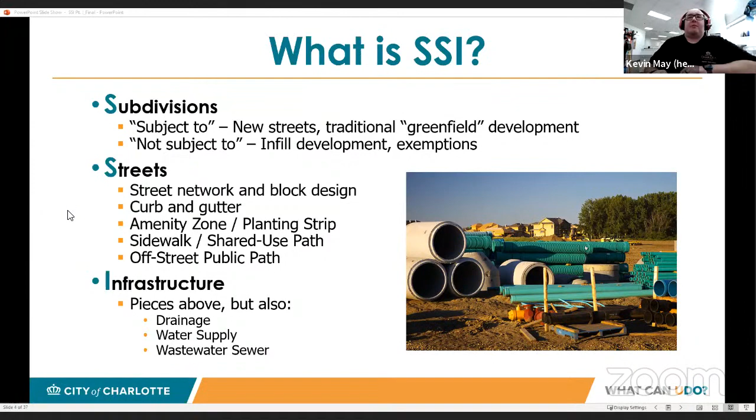So as we go forward, some of the high-level concepts and goals that we're trying to achieve as we go through our development of an SSI article is, as always, ensure alignment with policy. We want to recognize and address trends.

The subdivision ordinance, I think, was absent the 160D text amendment here recently, passed or updated in 2015. If I'm not correct on that, Josh or somebody can correct me. But that seems like it wasn't that long ago, but it was 6 years. And we all know that development can change pretty rapidly. Even though 6 years was probably pretty recent, the development world can change pretty frequently and fast as well. So we want to recognize where we currently are at, and then maybe also try to extrapolate out for some trends that may be coming as well.

And then also just a larger theme of the Unified Development Ordinance: we always want to create a better and more user-friendly structure. And then again, as part of that larger umbrella effort, providing consistency and uniformity—really putting the unified in the Unified Development Ordinance. We've heard this feedback, especially recently through our last series of meetings, and that's really trying to, as part of this effort, identify and leverage trigger alignment possibilities when it's feasible. It may not always be feasible to have alignment in those triggers, but where we can, we're going to aim to achieve that.

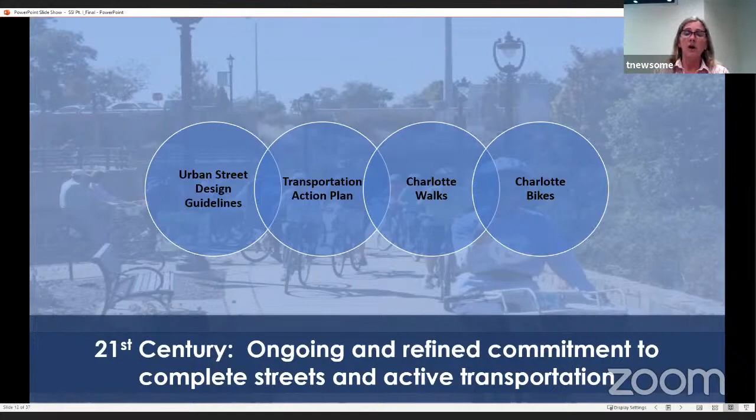So this has been a steady path in a direction towards a more multimodal network, a more sustainable network. And this is really culminating now—could you advance, please—culminating in the policies of the 2040 plan.

Kevin pointed out some of those policies, and as we go through the next few weeks and look at specific elements of SSI, you'll see that from a policy standpoint, it's more a commitment, a continuation of the same policies that have been in place for some time—basically to overcome having built a certain way for 50 years, and now making sure we're building in a way that is more sustainable, more multimodal. Can you advance, please?

As Kevin said, we're going to be pretty basic today because we want to make sure everybody's using the same terms or is familiar with the terms.

So we get asked the question, what is a street, since this is a street subdivision and infrastructure chapter. There are really two ways to look at this question: the basic question of what is a street, and then the more specific question of what is a street in terms of the UDO and how it's handled in the UDO.

For the basic question of what is a street—if you think about how a street feels and functions and how people use it—it really is that building-front-to-building-front space, the entire space between the buildings. From a UDO perspective, though, those of you who have been in this group and gone through the zoning work so far know that things handled on-site, for the buildings and their frontages, are handled in the zoning portion of the UDO. Advance, please.

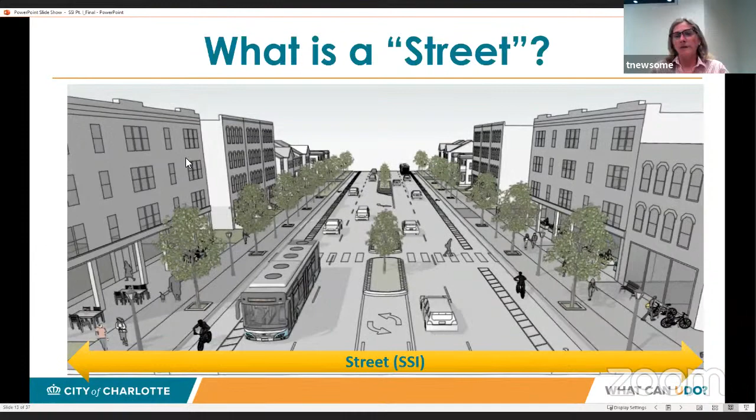And then it includes the pedestrian space as well, the sidewalk, or in some cases a shared use path where pedestrians and bicyclists share that space. So really, those are the components of the street that we're talking about when we discuss SSI and the types of policies embedded in the regulations.

Another basic topic, if you've been in this group all along, you're familiar that we've used these terms in bold in other parts of the UDO: limited access, arterials, collectors, and locals. This says street classifications, and I think you could argue that limited access, which basically includes freeways and interstates, aren't really streets, they're more roads or roadways.

But for the sake of discussion here, we'll leave them in this list as a street classification. So basically we've got limited access roadways, we have arterials—sometimes people use the term thoroughfare, we're using the term arterial—and we have different types of arterials, which we'll look at a little closer. Then we have collector and local streets as well. When we talk about the characteristics of a street, there are a lot of different ways you can say what this street is like compared to a different kind of street.

One of the first types of characteristics we can look at to differentiate between these streets—and I should say all of these streets are really on a continuum. It's a spectrum in terms of each of these characteristics and where they might fall along it. It's maybe not exactly linear.

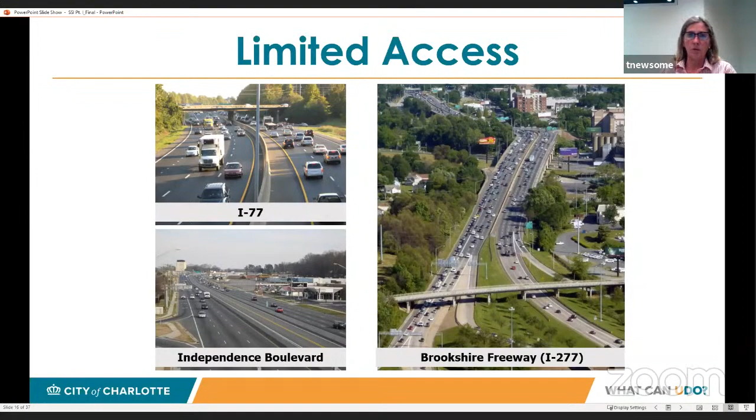In terms of the arterials, the Parkway is really very similar to other types of limited access roadways. We're calling it an arterial street. There are certain design elements we would want to include, even though it is a limited access street, if at all possible.

But it shares a lot of characteristics of limited access streets. You're not going to have a lot of driveways along it. You may have side streets on some of them, but not many. You're going to have a wide, hopefully continuous median.

to limit access and to limit turns. You're going to have a lot of space—you might have 4, 6, maybe even 8 lanes—but you're also going to have a lot of green space to the edges of the roadway, including a clear zone for safety because of the higher speed, higher volume nature of the street.

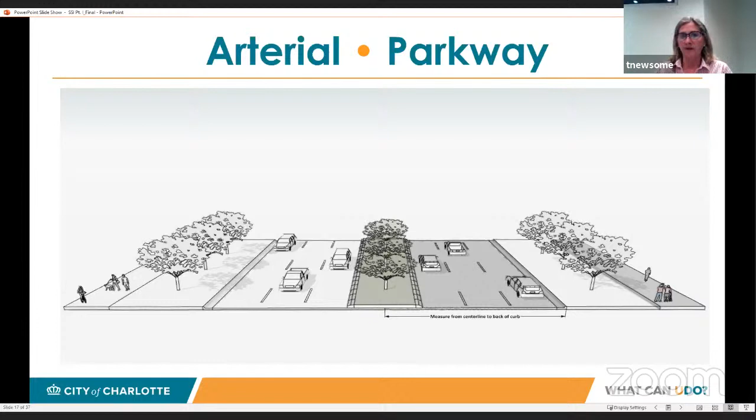If there is a multimodal facility associated with a parkway, it's going to be a shared use path, and it's going to be at the very back of the right of way or maybe outside of the right of way. But this really shares a lot of characteristics with limited access roadways.

A boulevard at this point becomes really more of a surface street, a traditional thoroughfare type street. It is a little higher on the spectrum in terms of speeds than an avenue, and certainly than a main street, but it's still not intended to be a high speed street. It could be anywhere from 4 to 6 lanes.

It is more access managed than some of the other arterial street types. So in terms of the center space, you're more likely to see a continuous median, some limits on turning ability, and some limits on direct access onto land uses along it.

So a boulevard can be applied in a fairly urban context, or it can be applied in a more suburban context, but it typically is going to have more access limitations. Some examples of this would be Tyvola Road in the Marion Diehl portion, or carrying the same corridor through Fairview out by Carmel.

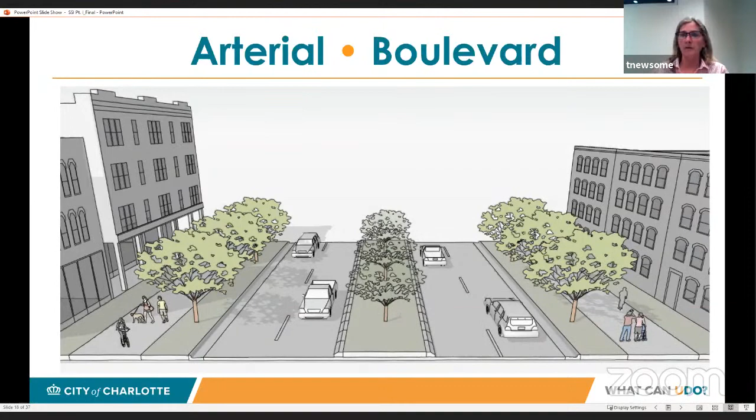Is it a perfect boulevard? Does it have all the pieces? Maybe not, but this just gives you an idea of the type of street we're talking about.

The avenue is probably the arterial street type where we're trying to balance this multimodal aspect as much as possible. Access might still, in some circumstances, be a little bit limited, but it opens up certainly compared to a boulevard. So it's a little less access managed, and as a result, the center space might be very different.

It might be turn lanes, space for turn lanes. It might be portions of a continuous median. It might be space used to create pedestrian refuge opportunities where there might be long distances between signalized crossings, so that people can get across the street. It can work in a very urban environment, and it can also work in a suburban environment.

You're going to have travel lanes. They're going to be anywhere from 2 to 6, but many of them are going to be in the 2 to 4 lane range in terms of through travel lanes. An important point is the speeds will be low. The volumes are expected to be lower than a boulevard, but in some cases they're not, because we still have a sparse thoroughfare network and a sparse arterial network. So that means we can still have some high volumes on a lot of these avenues. The point is we're trying to handle that volume a little bit differently.

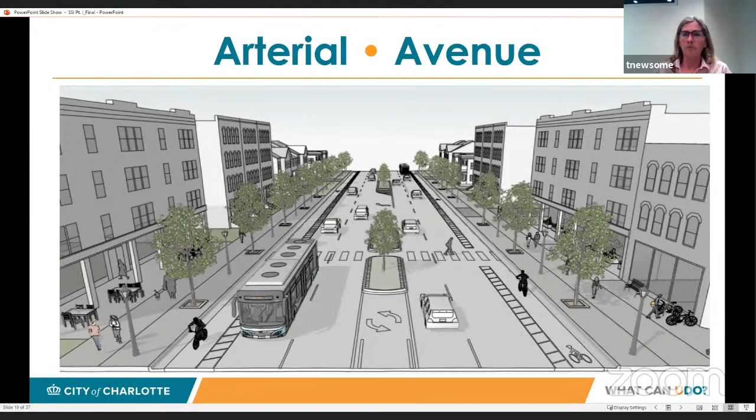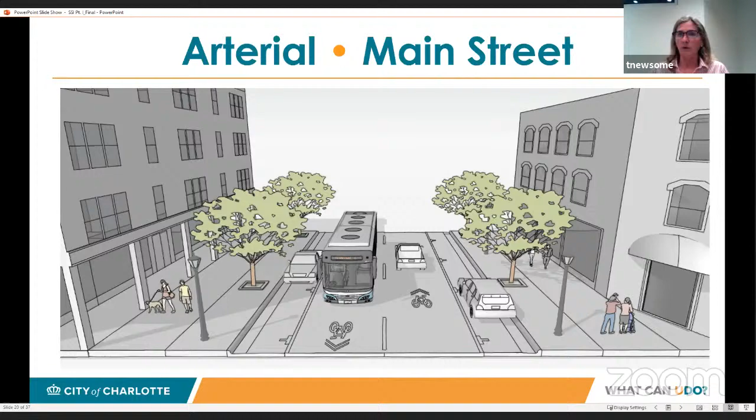So you might be asking at this point, okay, that's great, we've got these different kinds of arterials—how do we know which one is which?

There will be a map that will say which of the arterials is which. This is something we're currently using for the transit-oriented development districts along the Blue Line. There's a map that says not only what is the classification of the street, but what is the expected cross-section for the street and where does the future curb line go, so that we can create clarity and predictability about the changes as they occur along the street. What will happen is that we'll expand this streets map citywide to include basically the entire city, not just the Blue Line, and it will function in much the same way—not very different from how it's being used for TOD now.

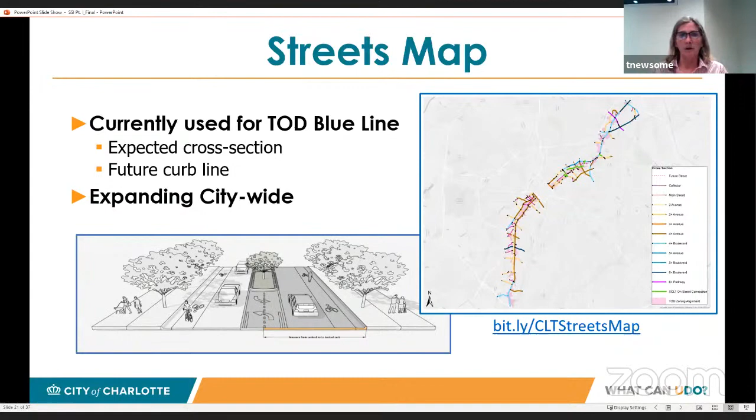So the arterial streets will be on the streets map. Actually, the limited access streets will also show on the streets map, but without cross sections, and we'll get into all of that down the road.

No pun intended. So the local streets are not on the streets map. There are several types of local streets that are basically scaled to the context in which they're used and applied in different contexts. While the arterial cross sections will be on the streets map, the cross sections for these local streets will be in the Land Development Standards Manual, and that's pretty much how it works now as well. So there are residential streets, office commercial streets, and industrial streets, and they are applied in those appropriate contexts.

Collector streets, if you remember the spectrum arrow, actually fell between arterials and locals. It really serves a hybrid function in the network. From a design perspective, collector streets are fairly similar to local streets. The volumes fall between arterial and local street volumes. The speeds are low like local streets, and they serve to create a connection either to or between arterials. They connect to arterials in cases where there's a very disconnected network, and they connect between arterials where the network is a little better connected. So they serve a very important function, but they're kind of a hybrid type of street.

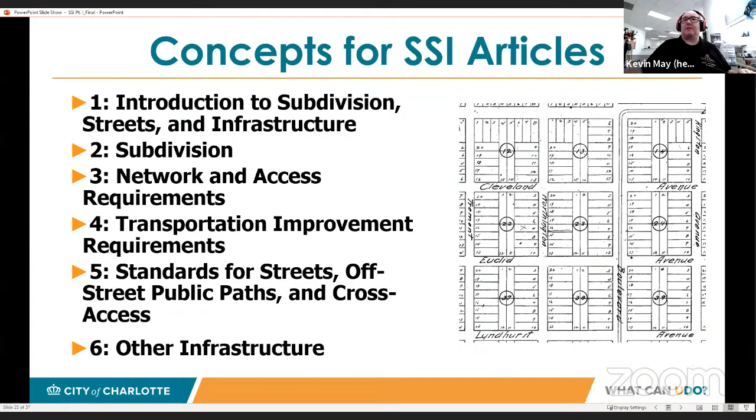We'll start today because it's a high-level article conceptually for subdivision, streets, and infrastructure, following the framework many UDO sections use. Our introduction article establishes a purpose: primarily to protect and promote public health, safety, and welfare. We're seeking to coordinate existing and future streets and infrastructure to ensure appropriate distribution, including additional transportation choices, and to provide safe and efficient access to land uses, with a concentration on transit, pedestrian, and bike facilities. We always hear about the issue of network connectivity, so we want to create and improve a network of well-connected streets and transit services, securing rights of way or easements to achieve complete streets and other infrastructure, and promote orderly growth through the division or consolidation of lots for development.

Continuing in the same introduction article, we address applicability and administration. We've already had conversation about applicability today - the SSI piece will apply in the city sphere, including the city proper as well as its ETJ, or extraterritorial jurisdiction. We've also heard about conflicts between city standards and NCDOT standards. Conceptually, for development abutting an NCDOT controlled street, the city's SSI standards would apply unless superseded or prohibited by NCDOT standards. An important caveat: often Division 10 city staff and NCDOT staff work together to mitigate that conflict and reach a mutually agreed upon resolution.

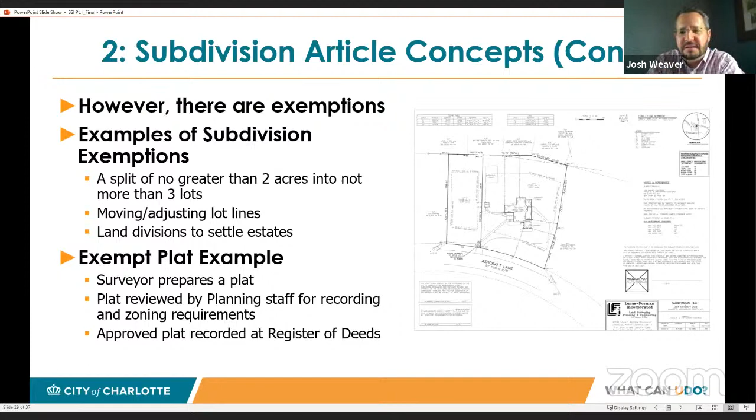Now, if you are a subdivision, there's different criteria that staff need to look at in order to meet the subdivision ordinance. Let's move on to the next slide, Alan.

So if you meet the definition of the subdivision ordinance, you can either be a minor subdivision or a major subdivision. Minor subdivisions are smaller—they don't include new streets. They could require curb, gutter, and sidewalk to be installed along the street if they don't exist, but they don't include things like drainage easements or new streets. They're relatively small in nature.

Because they're small, minor subdivisions don't normally include construction documents—they don't have plans that need to be reviewed. The only time we'd have plans is if curb and gutter is required, and we need to make sure those improvements are installed so that they meet city standards.

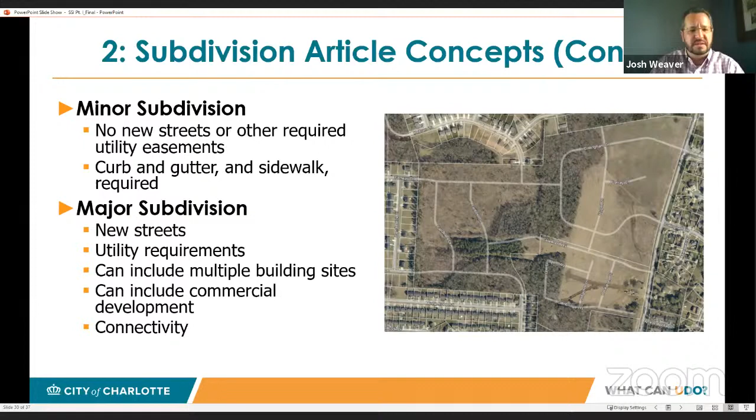On the other end of the spectrum, a major subdivision is what you'd typically picture as a subdivision—new streets, single family lots, or a multifamily project with new streets. It's more involved, and staff do a lot of review. So we're going to walk through the process of what a major subdivision involves. Next slide, Alan.

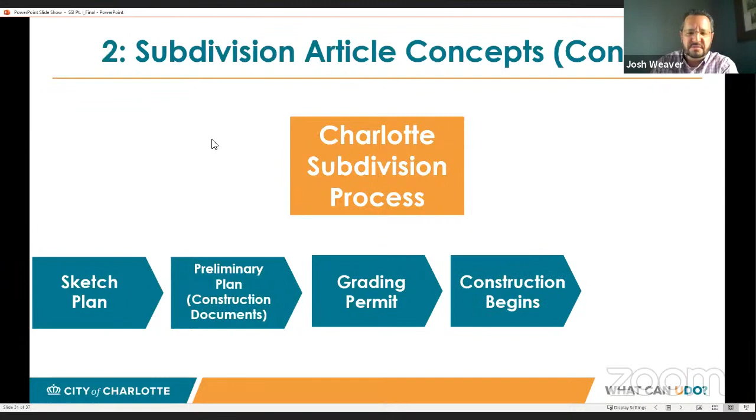So if you're a major subdivision, it starts with a sketch plan, then moves forward into a preliminary plan, or full construction documents, for that subdivision. Once those construction documents are approved, we can issue a grading permit to allow construction to begin, and then it moves on into building homes. Next.

This portion is where staff work with designers, and the designer submits a sketch to make sure the overall concept of the subdivision meets both the subdivision ordinance criteria for streets and the zoning ordinance criteria for lots and structures or multifamily projects.

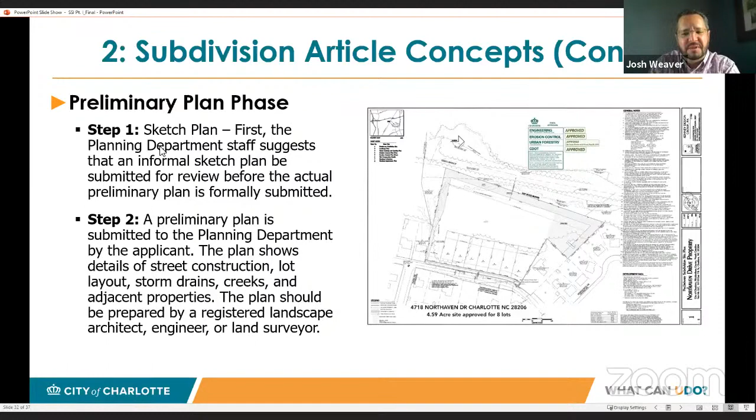Once sketch comments are provided to the developer and designer, they submit a preliminary plan with full construction documents for that subdivision. It's reviewed, and comments are provided by both subdivision staff and our staff that was formerly engineering—now stormwater, Charlotte Water, our Department of Transportation, and urban forestry—all kinds of city staff to make sure those plans are compliant with all city criteria.

Next. Those plans often go through multiple reviews. We try to have plans reviewed and approved within two and a half reviews. Once they're approved, the developer can go out and start grading. Next.

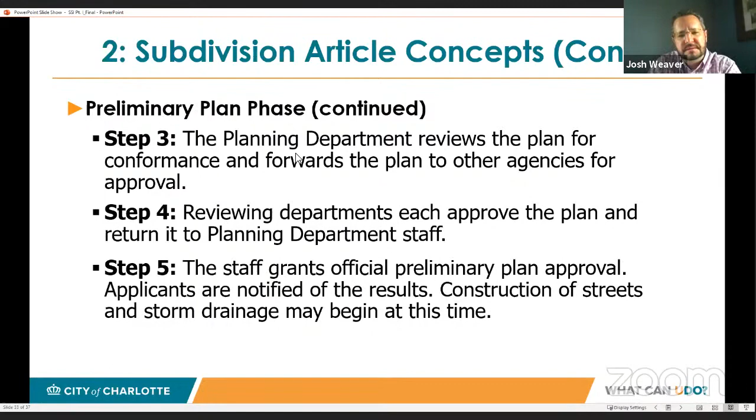After the preliminary plan is approved and construction is started, normally—if it's a single family subdivision—the developer goes out and starts doing infrastructure work. The roads are installed along with drainage and those basic things. Then the final plat is submitted through Accela, our electronic tracking program that allows staff to keep up with our processes. All of our preliminary plans and plats are reviewed electronically through Accela.

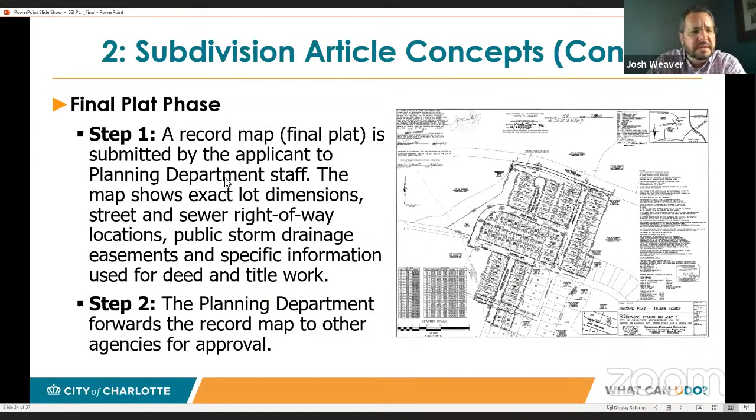Once a plat is submitted, we make sure it matches what was approved in the preliminary plan. Then, in the case of single family or anything with a new street, a bond is posted for any improvements not yet done, and the map can be recorded. At that point, homes can be constructed on those new lots. Next up, our next slide.

So I guess that's the end. And do we have any questions?

Thanks for that, Josh. We did have one come through that I think you kind of handled in real time. Walter was asking for some clarity: do the preliminary plats go straight to planning, or are they submitted through Accela? And just to reiterate, I think you said all of the plan reviews go through and are submitted to Accela. Yes, they're submitted through Accela to planning electronically, Walter.

Yeah, so that was the only thing that came in through the chat box. Thank you, everybody. Does anybody have anything they'd like to raise their hand and ask or comment on? Yes, Walter.

I asked that question because I was a little confused. The slide said it's submitted to planning, which is why I asked the question. But I've also encountered a situation recently with someone who has told me and asked me to look into why their plans are not being allowed to be submitted to Accela by a member of the staff, about some change that somebody wants. And it's keeping the whole thing, the other 99% of the plan, from being reviewed. It's been 2 or 3 weeks. So if we can submit to Accela, who would be in a position to prevent that from happening? If you have a complete plan that meets all the standards and you do all that Accela magic stuff that you do, under what circumstances can someone say you're not allowed to submit your plan until you change something, even when it hasn't been reviewed yet?